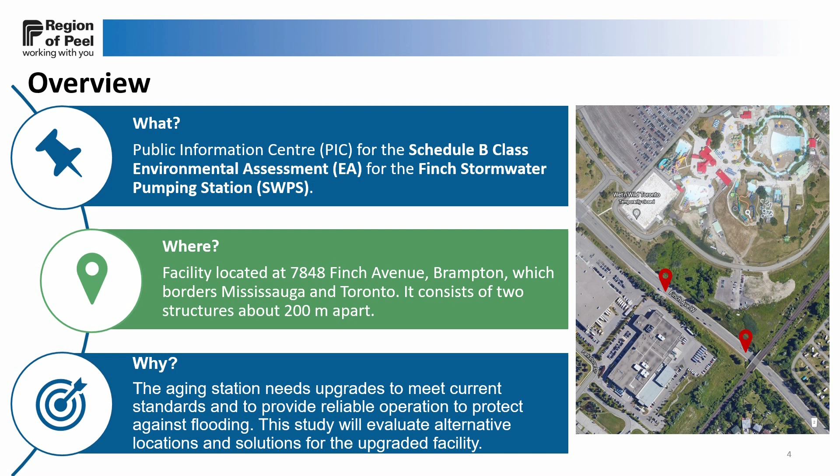This Public Information Center provides an opportunity for the public and stakeholders to learn about our decision-making process, ask questions, and provide feedback on the purpose of the study and preliminary recommendations. Questions and comments related to the PIC materials can be submitted to the Region of Peel through the project website or directly to the region's project manager, Paul Restrulo, at paul.restrulo@peelregion.ca from June 1st to June 15th, 2023. On June 30th, responses to questions and comments will be posted on the website.

The Municipal Class Environmental Assessment process is a decision-making framework that Ontario municipalities follow when planning for construction of new infrastructure or rehabilitation of existing infrastructure. This study follows the Municipal Engineers Association Schedule B Class EA process, which need to satisfy phases 1 and 2, including identification of the problem or opportunity, development and evaluation of alternative solutions, and consultation with the public and other stakeholders.

What is stormwater? Stormwater is runoff from rainstorms and melted snow. On natural surfaces, the water is absorbed into the soil. On hard surfaces, such as roads and parking lots, the water cannot be absorbed by the soil and starts to accumulate and flow towards low-lying areas. This can cause flooding in urban areas that have a lot of paved surfaces.

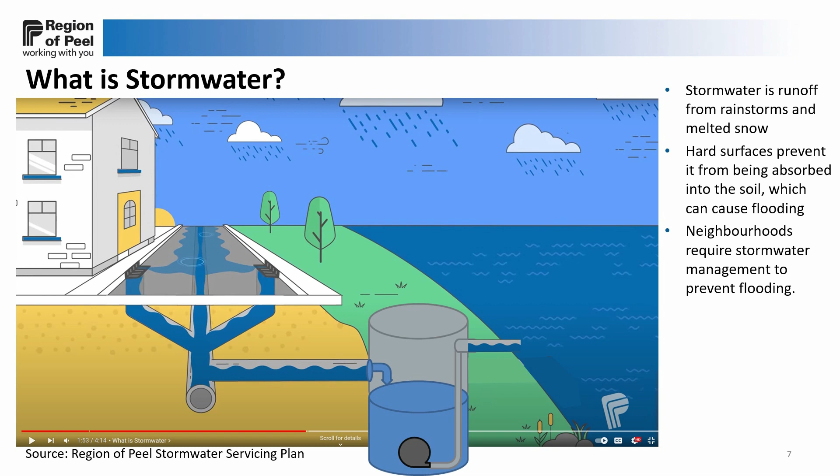As a result, municipalities construct stormwater infrastructure, which includes underground pipes and street grading that collect and divert stormwater towards nearby water bodies, such as creeks and rivers. There are instances where stormwater accumulates in low-lying areas and needs to be pumped uphill to reach a water body and prevent flooding. Stormwater pumping stations, such as the Finch Stormwater Pumping Station, are built to pump accumulated water in these low-lying areas. These structures often need a small building nearby to store the electrical equipment needed to run the pumps.

The Finch Stormwater Pumping Station consists of two parts, a wet well and a control building, which are located approximately 200 meters apart. The wet well is a below-grade concrete structure housing two pumps. Stormwater from the area drains into this wet well through a series of storm pipes and is pumped from the wet well into the Finch Avenue stormwater collection system. The control building houses electrical equipment.

The station is designed to prevent flooding on Finch Avenue during the worst storm that is projected to occur about once every 10 years. If there is a pump failure or if the flow to the station exceeds its capacity, there is a risk of flooding on Finch Avenue.

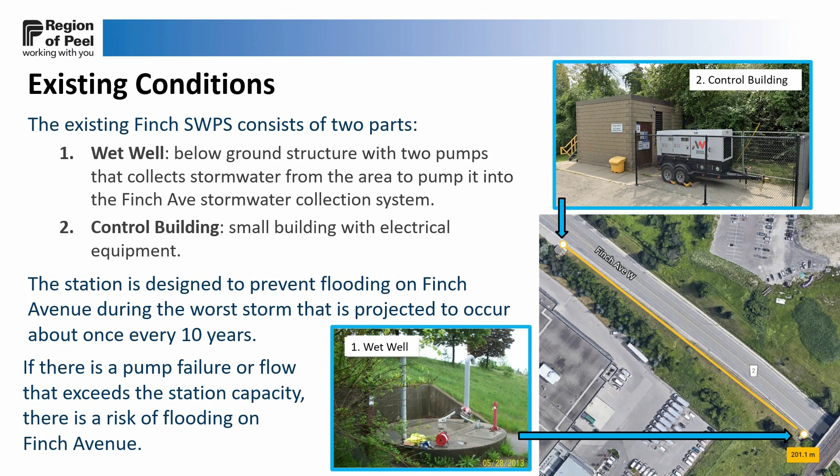The first step in any Class EA process is to define the problem and opportunity statement. This answers the question of why are we undertaking this study, and what are we trying to address? Our statement for this study is as follows. The Finch Stormwater Pumping Station, constructed in 1984, was designed to lift stormwater from a low-lying area under a railway underpass to a nearby storm sewer to protect the area from flooding.

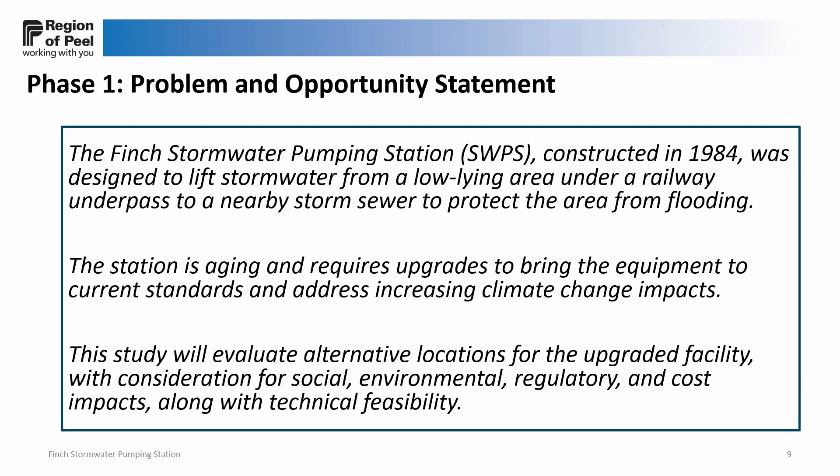The station is aging and requires upgrades to bring the equipment to current standards and address increasing climate change impacts. This study will evaluate alternative locations for the upgraded facility with consideration for social, environmental, regulatory, and cost impacts, along with technical feasibility.

The area included in the study covers a small segment of Finch Avenue in the city of Brampton and the city of Mississauga. A segment of the CN Railway is included in the study area. The City of Toronto municipal border is nearby to the east, outside of the study area.

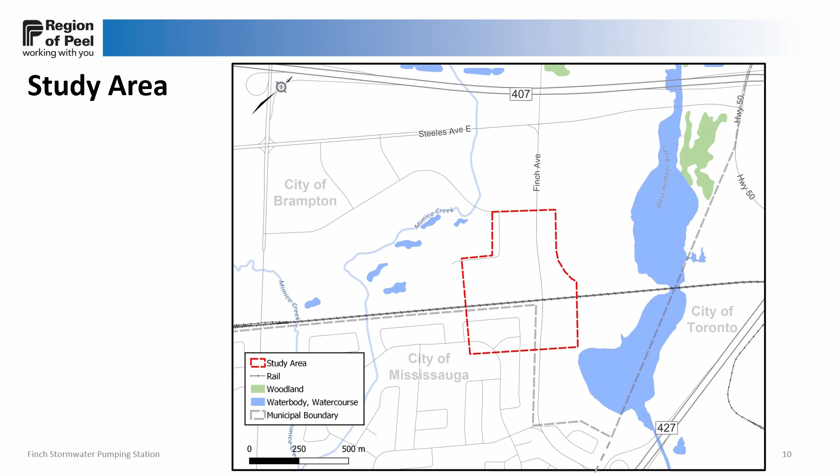The existing Finch Stormwater Pumping Station is in Brampton. The wet well is located next to the CN Railway on the northwest side. The control building is located 200 meters away along Finch Avenue near commercial buildings.

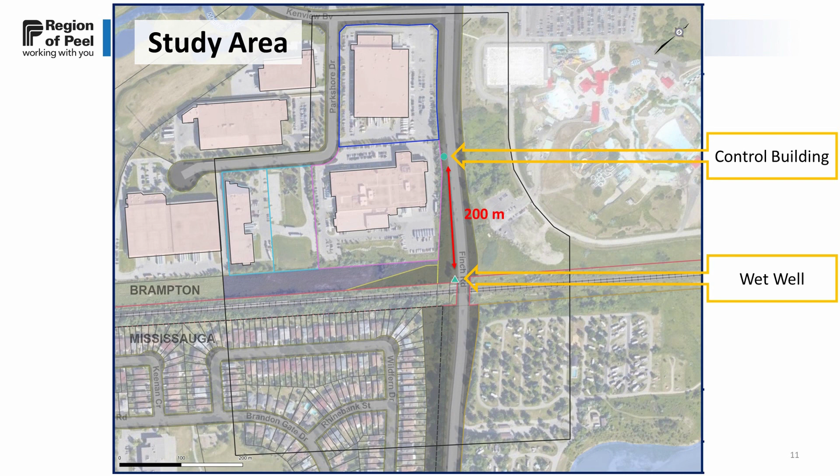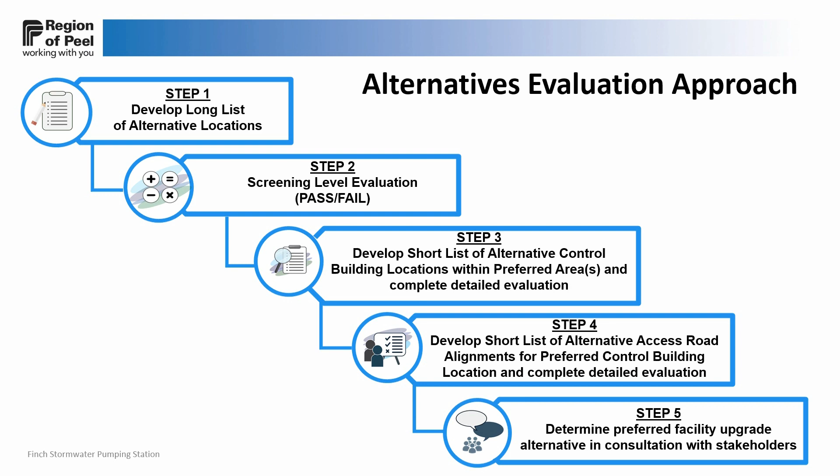Our approach for developing a preferred stormwater management solution consists of 5 steps. First, we developed a long list of alternative locations. Second, we screen each alternative based on must-have criteria. Third, we develop a short list of alternative facility locations within the preferred area and complete a detailed evaluation. Fourth, we develop a short list of alternative access road alignments for the preferred facility location and complete a detailed evaluation. Lastly, the preferred facility upgrade alternative is determined in consultation with stakeholders.

We have developed a long list of alternative areas for the upgraded station. The alternatives include 4 quadrants to the west, north, east, and south corners of Finch Avenue and the CN Railway.

The alternatives are screened based on whether they provide sufficient land to house the facility without impacting existing structures on private property, and whether the facility could be constructed within region-owned land without expropriation.

Of the 4 alternative areas, Alternative A, which contains the existing pump station, passes the screening level evaluation and is carried forward for detailed evaluation.

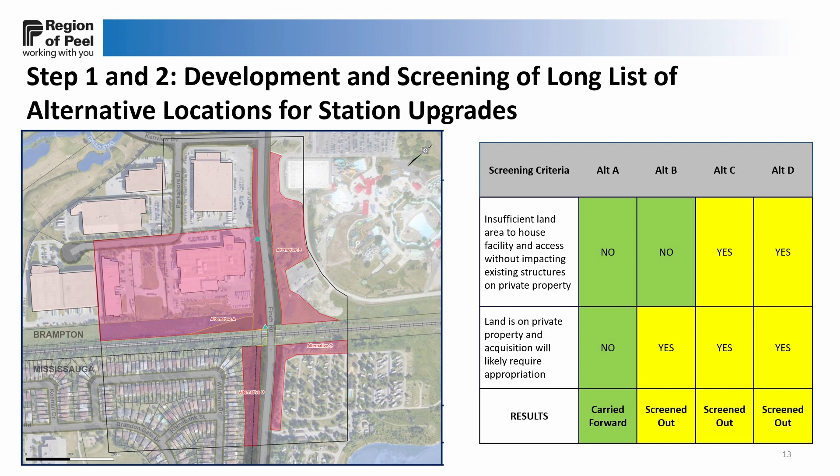The detailed evaluation will be based on 4 categories of criteria: natural environment, socio-cultural environment, technical feasibility, and economic or cost considerations. We have developed a draft list of criteria and are interested in your opinion as to whether there are other criteria to consider and what criteria are of the highest priority to you.

The next step is to develop a short list of possible control building locations within the Alternative A location. We identified 3 potential alternatives.

The alternative to do nothing and keep the existing facility as is was considered, as this provides a baseline scenario for comparison during the detailed evaluation.

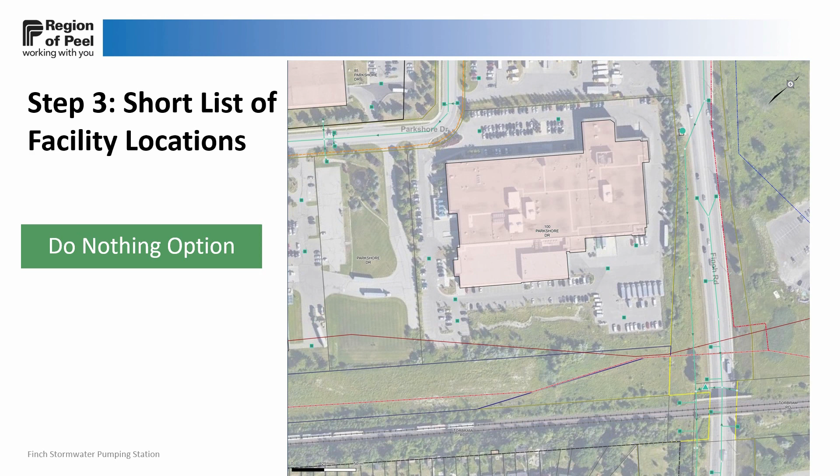Facility Alternative 1 consists of building a new control building at the same location as the existing one and keeping the wet well in its current location.

Facility Alternative 2 consists of building a new control building next to the existing wet well, maintaining the current wet well location and demolishing the existing control building.

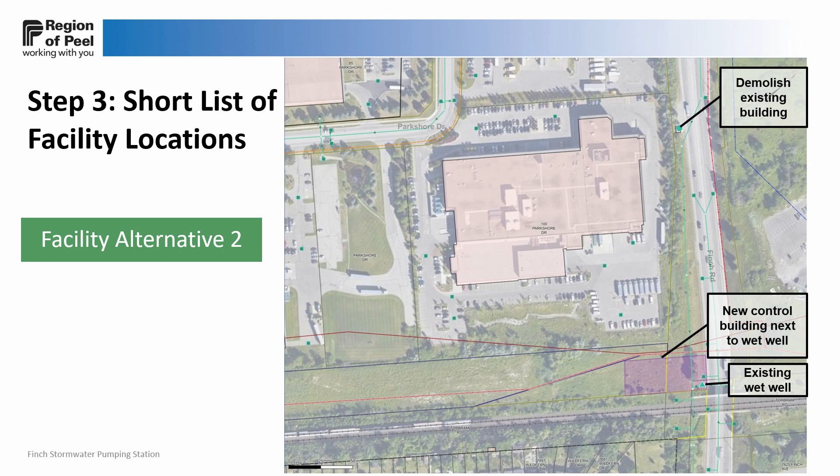The option to do nothing does not meet current design standards, which results in a higher risk of flooding and potential impacts to the community. Overall, it ranked the lowest.

Facility Alternative 1 is expected to have some constructability challenges, as the new control building would need to be constructed directly next to the existing control building, with limited space. Furthermore, the control building would still be 200 meters from the wet well, which makes vehicle access to maintain pumps more difficult. Overall, it ranked second.

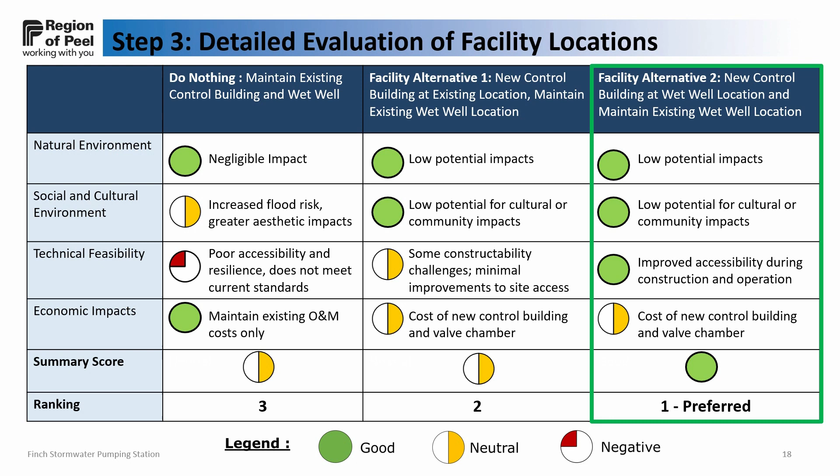Facility Alternative 2 improves operator access to the site by locating the control building next to the wet well. This alternative ranked the highest. In our draft evaluation, we carried forward Facility Alternative 2 with the control building next to the wet well as the preferred location.

Now that the preliminary preferred location for the stormwater facility is determined, we developed a short list of alternative road alignments to access the facility. Access roads are important to allow vehicles to reach the facility to inspect and maintain equipment.

We identified 3 road alignment alternatives. Access Alternative 1 consists of building an access road from Finch Avenue.

Access Alternative 2 provides access through the nearby Canadian Blood Services parking lot and by building a short road extension to connect to the proposed station. This would require a permanent easement through private property.

Finally, Access Alternative 3 provides access through a driveway on private property owned by Granite, along with construction of a new section of road through the unpaved perimeter of the Canadian Blood Services property. This alternative requires a permanent easement through 2 private properties.

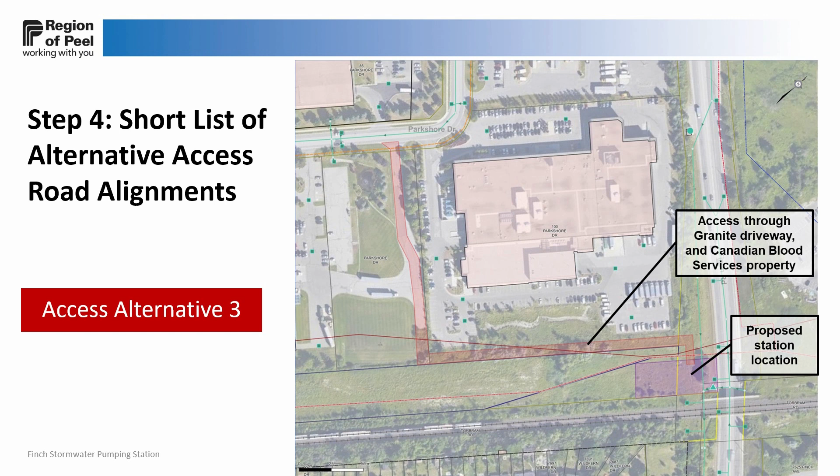This alternative will be somewhat more challenging to construct to accommodate steeper slopes in this area, and additional traffic controls will be required to work close to Finch. Overall, Alternative 1 is ranked the highest.

Alternative 2 requires property and has the highest capital cost. Alternative 3 also requires property and has greater environmental impacts as it passes close to a wetland and potential animal habitat. Alternative 1 with access from Finch Avenue was carried forward as the preferred access road alternative in our draft evaluation.

Overall, our draft assessment determined the preferred solution for this project, which is to construct a new control building on the south side of Finch Avenue, west of the CN rail, next to the existing wet well, and install a new access road from Finch Avenue.

We welcome your participation in this study and will be open to questions and comments until June 15, 2023. Once we receive feedback, we can move forward towards selecting a final preferred solution. The construction is tentatively scheduled to begin in 2024.